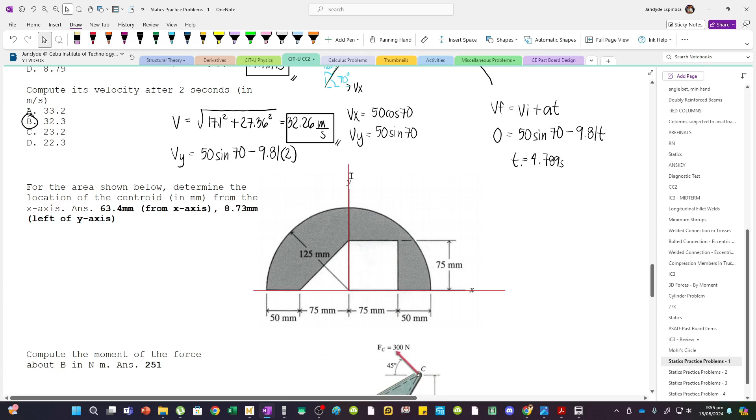So, this is my reference axis para sa barred Y. And then, ito naman yung reference axis ko para sa centroidal y-axis. Now, yung centroid ng semicircle is located somewhere dito. Now, this is at a distance 4r over 3 pi.

And then, yung centroid naman ng ano yan? This is essentially a square. Yung centroid niya nandito. So, this is 75. Again, all distances must be measured up to the reference axis. So, ito rin. This is 75 over 2. This is also 75 over 2.

And then for the triangle naman, it has a centroid right here. And then this distance going to my reference axis, this is 75 divided by 3. And then ito rin. From this point patungo dito, this is also 75 over 3. Now, let me just clarify. If you have a triangle, yung iba kasi medyo nalilito sila kung saan yung 1/3, saan yung 2/3.

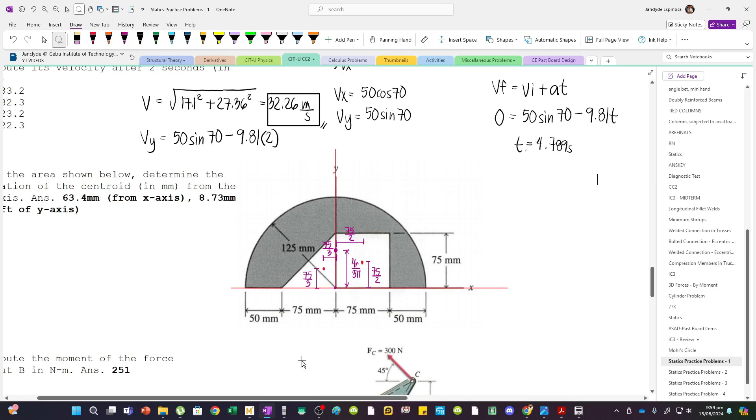Now, we have x, y, and then another column for frequency. So, sir, ano yung input values ko sa x? Ano naman yung sa y? Yung input values mo must be the distances from the reference axis patungo sa centroid ng individual shapes mo. Ano naman yung sa frequency? Sa frequency, yan yung areas mo. And then take note na if the area is hollow, you have to use minus.

So, first, let's consider the area of the semicircle. The area of the semicircle is just pi r squared, yung area ng circle, divide natin by 2. Now, the radius is 125. So, yung area natin para sa semicircle is pi times 125 squared divided by 2.

Now, yung distance ng centroid niya along the x-axis is, I mean, 0 pala. Sorry. Ito kasi yung x-axis natin. Wala siyang distance. And then, ito yung x distances, ito yung y distances. So, yung y distance natin, ito yung reference axis. Going to the centroid of the semicircle, we have 4r divided by 3 pi. So, 4 times 125 divided by 3 pi.

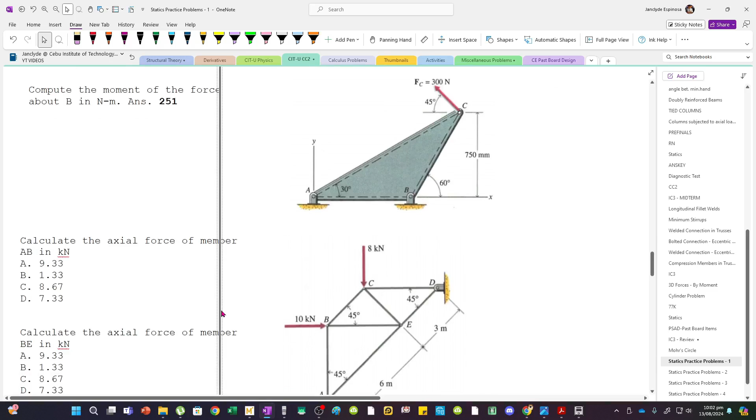And then yung distance naman along x is still 75 over 2. And this is positive because this is to the right of the y-axis. I hope that's clear. So, next, let's consider the triangular area. The triangular area is 1/2 times the base, which is 75, multiplied by the height, which is still 75. So, gagawin na lang natin 75 squared.

And then, yung distance natin along x is from here up to here. This is to the left of the y-axis, so distance must be negative. So, negative 75 divided by 3. And then, the distance along y is 75 divided by 3. And by the way, solid yung semicircular section, but hollow tong portion na to, yung dalawa. So, we have to use minus for this area and also this area.

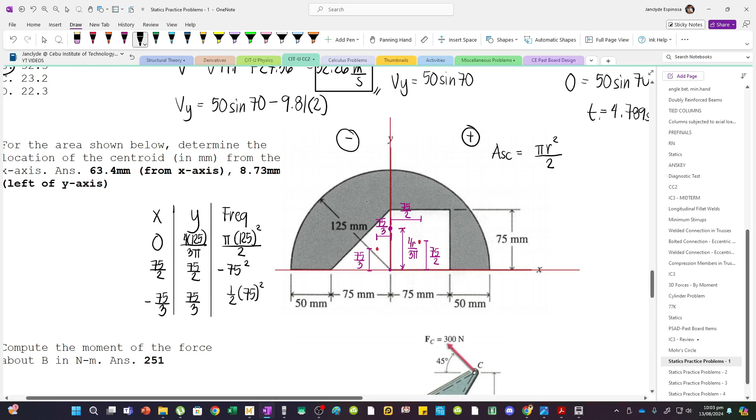So, input natin yung values sa calculator: go to mode, and then stat, then press linear, so 2. Wala pang frequency, so shift mode, press down, go to stat, 4, and frequency must be on. So, input natin: 0, 75 over 2, and minus 75 divided by 3. For the y distances, we have 4 times 125 divided by, parenthesis mo yung 3 pi, close mo. And then 75 over 2, then 75 divided by 3. Again, take note sa negative signs mo.

Next, we have pi times 125 squared divided by 2, then negative 75 squared, and another negative 0.5 times 75 squared. So, press equals. After nyan, press CA. Lalabas yung 0. So, press mo na yung apps, dito ka sa S-VAR, press 5. To get X bar, press 2. So, X bar is negative 8.73, kaya 8.73 siya left of the y-axis.

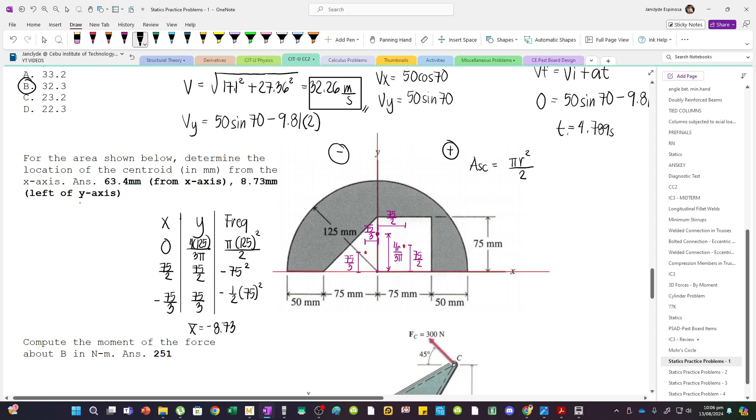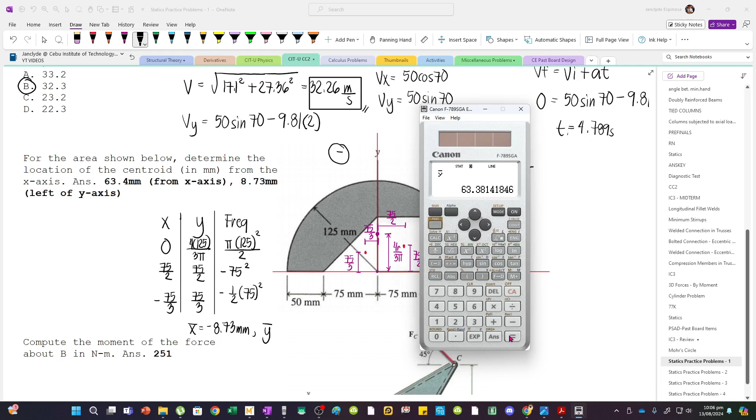So, lagay natin X bar equals negative 8.73 mm. And then, for y bar, press apps ulit, S-VAR 5, then press barred y. So, we have 63.38 mm. Since positive, meaning it's above the x-axis. So, ito na yung sagot natin.